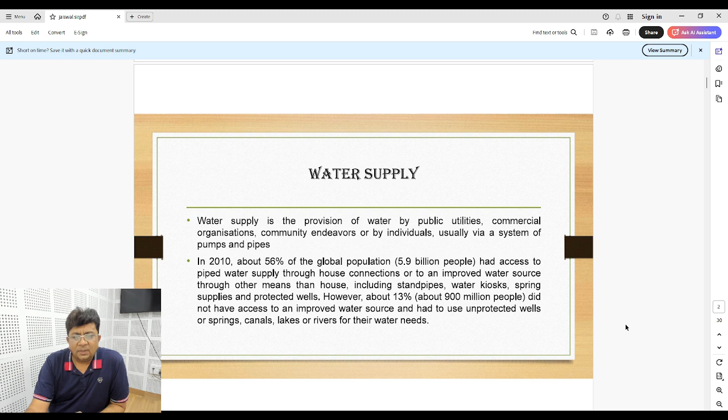The water in our homes comes in a very intermittent way. Many developed countries have the advantage of continuous water supply in their homes, and they take it for granted. But in many developing countries, water is still a problem because the population doesn't have access to a regular supply. They get water on an intermittent basis, sometimes a few hours a day, or maybe a couple of days in a week.

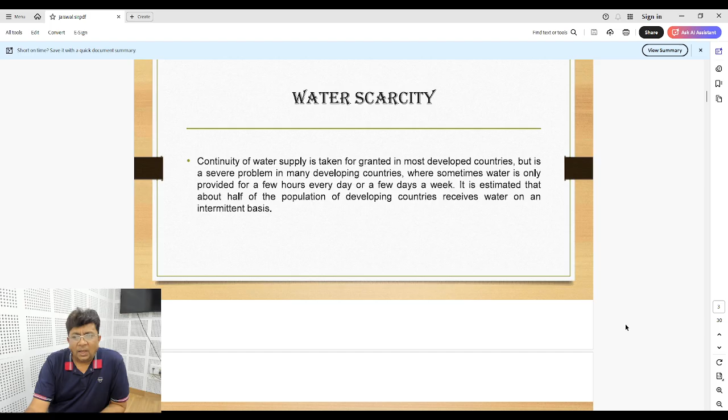In India also the system is not that great. We have states like Rajasthan and some places in Gujarat where there is a huge scarcity of water, and a continuous struggle for the common man to get potable water in their homes.

So to get continuous supply of water in our homes and buildings, we have developed water supply systems to get water in our homes, commercial establishments, industry, irrigation, and for public needs like firefighting and street flushing. The purpose of domestic service water supply system is to provide consumers with enough hot and cold water. In old buildings, it is common to have gravity storage tanks on top of the building, but nowadays we have developed very good systems where we can pump water directly to multi-storey buildings wherever required.

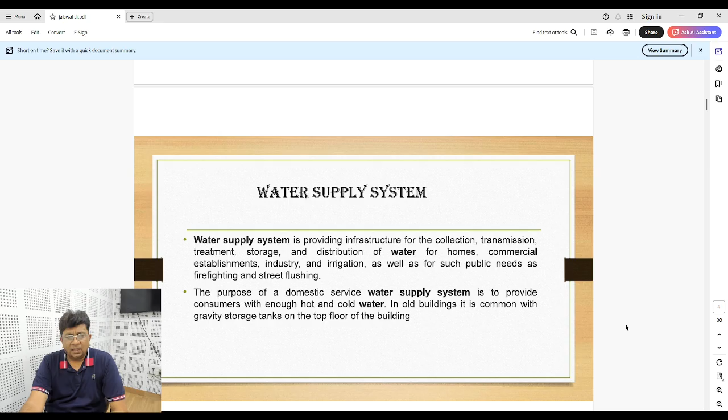My main focus today is to cover the water supply system in a building and in interiors. So we also need to understand the different types of fittings and fixtures available for use in our toilets, kitchens and balconies for domestic purposes.

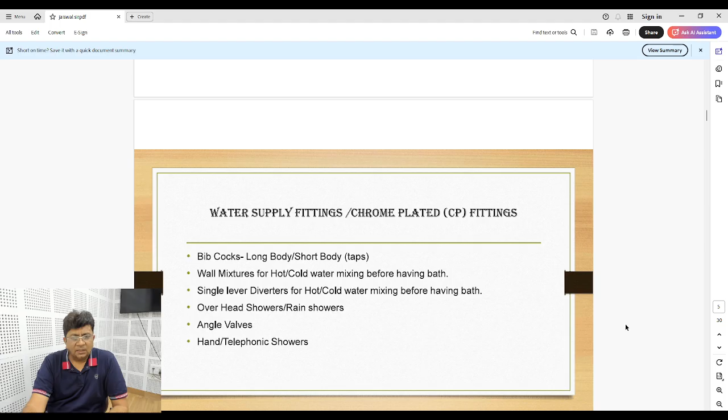For example, there is a bibcock, which we normally call a tap or toti. Then we have wall mixtures for mixing hot and cold water before bathing. Then we have single lever diverters - as the word tells you, it's a single lever which operates, and you can use it to get the desired mixture of hot and cold water.

We have overhead showers for a luxurious feeling of bath. One can also have rain showers, which will give you the feeling of bathing under the rain.

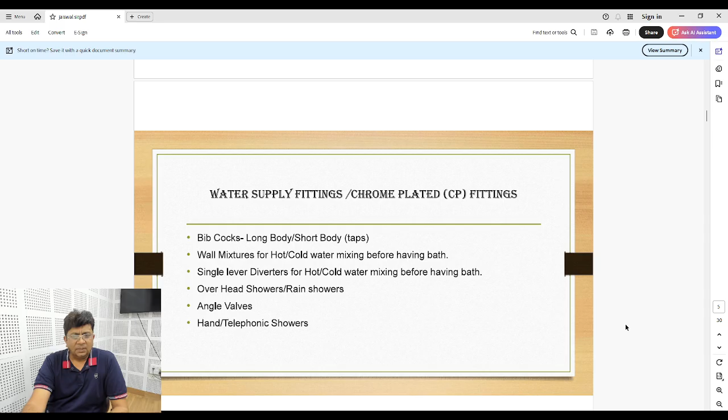Then the angle valves. Angle valves is basically a fitting which controls the flow of water to the main, for example, bibcock or the cistern or the diverters. Then we also have hand and telephonic showers.

Then there are the CP fittings. CP is like chrome plated fitting, for example, health faucet, which is used with the WC, and angle valve, as already told. Then we have wash basin mixer.

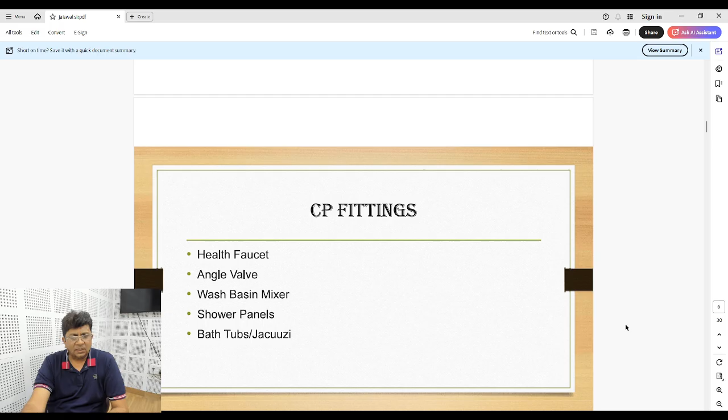Wash basin mixer is popularly known as basins. Then shower panels. Shower panels is like one panel which is installed in the toilet, where you can have multiple water outlets at different levels, which can enhance the feeling of having a bath.

Then there's a bathtub. Bathtub, as we all know, is normal. You can fill the tub with water and can have a good feeling of having a bath in a tub.

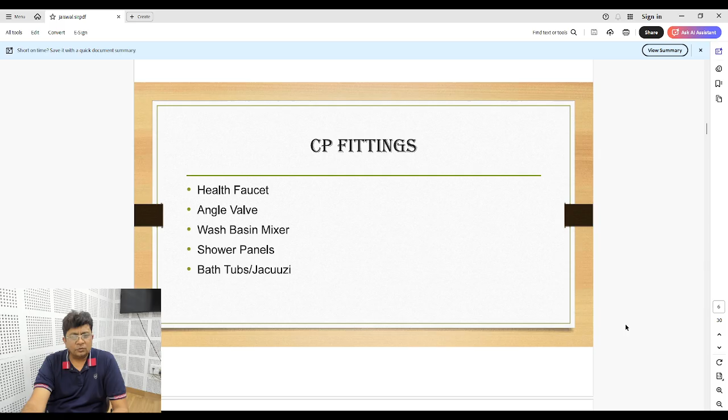And then there's a jacuzzi. There's a slight difference between bathtub and jacuzzi. It's the same as a bathtub, fitted with pressure pumps, so that you can have water coming out in force to give a relaxing or soothing experience of having a bath.

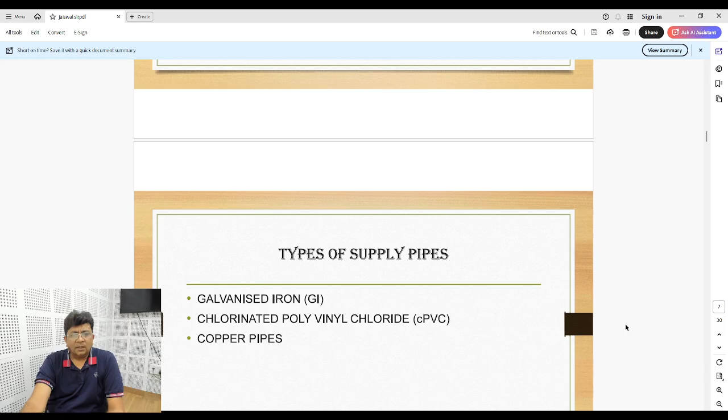Different types of water supply pipes are available to carry water up to our toilet. Earlier, we used to have galvanized iron, or GI system, but that is becoming obsolete nowadays since the advent of PVC. In toilets, water supply is basically done with CPVC pipes, called chlorinated polyvinyl chloride.

Plastic, as we all know, is a very recent discovery, and it may be a disadvantage in many other industries, but in interior services for water supply purposes, it has a huge advantage of carrying water over GI, because having a water supply system with GI was very cumbersome. There was a lot of logistics required, and it was easily prone to wear and tear.

But CPVC pipes have long life and are very simple, easy to carry and transport, and are also long durable. So CPVC pipes have huge advantages over GI pipes in water supply systems.

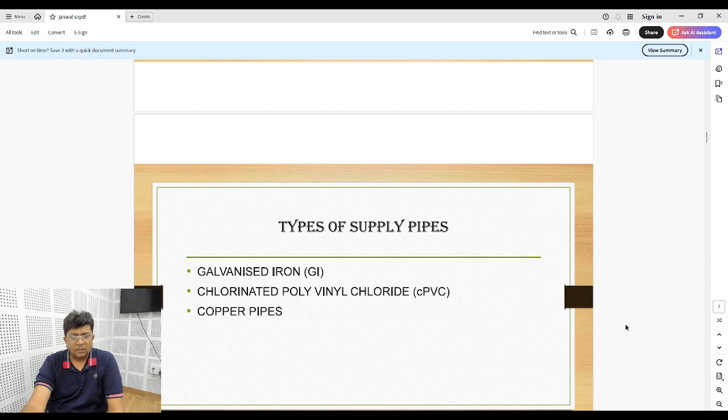Then there are other means of transporting water to our homes. Nowadays, copper pipes are also getting popularity because of their long life and less contaminated water supplied to our homes.

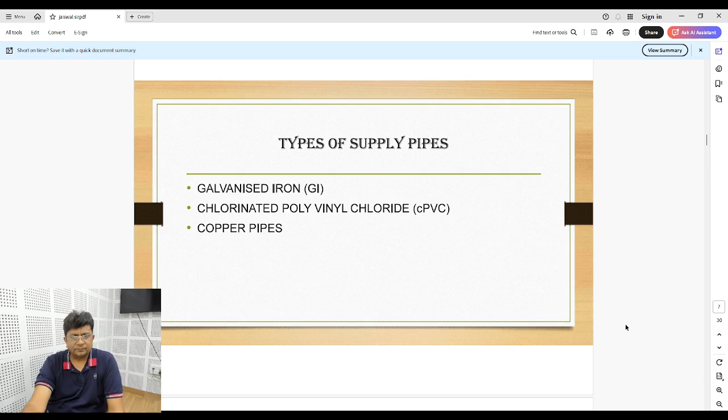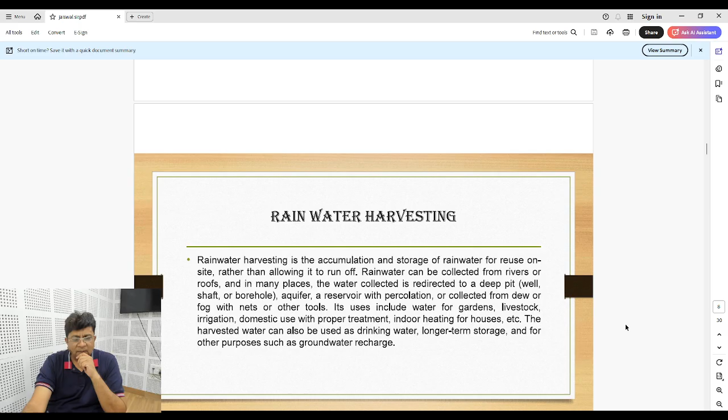Before we get further into the water supply system, as already told, there's a lot of scarcity of water in our states, in our country. So it is very important to have a rainwater harvesting system.

What does rainwater harvesting do? It is not a very new concept. In earlier ages, like Mohenjo-daro and Harappa, the earliest civilizations, we discovered there was a proper water harvesting system. Now, as we all know, the rainy season is just 2 or 3 months in a year. The rest of our months are mostly dry and hot weather.

So, to have a continuous supply of water in our homes, we should actually depend upon the rainwater harvesting system. People may think rainwater is in very abundance, but the moment rainwater touches the ground, it gets contaminated.

So there are two ways of harvesting rainwater. One is, in our buildings, so much water falls on the terraces. The water falling on the terrace can be easily collected through a proper drainage system, and it can be collected into an underground tank or underground reservoirs, for future use.

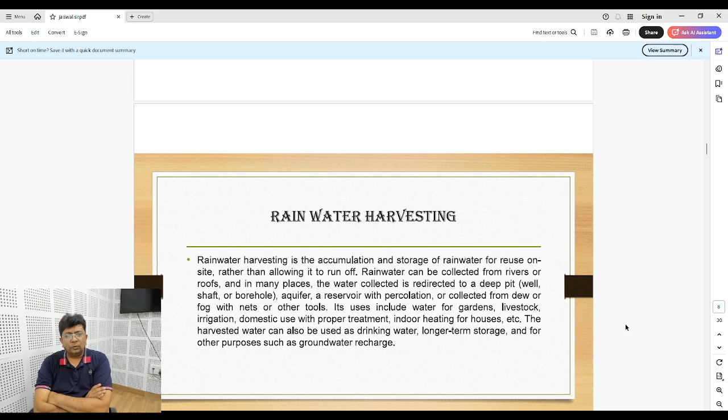Rainwater, as we all know, is one of the purest forms of water. So this water collected in the tanks, I'll show you the pictorial photograph also.

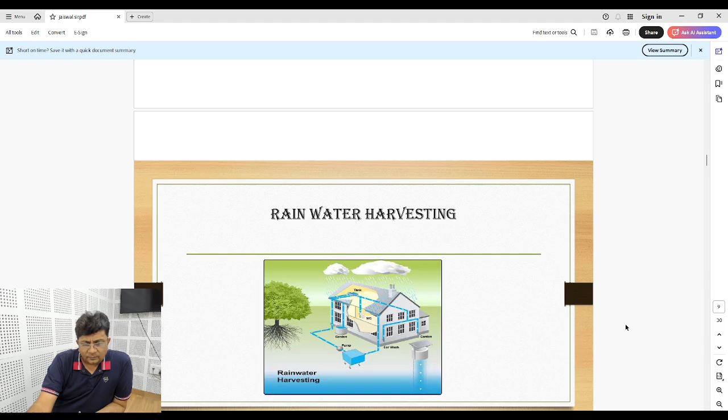So we see there are two methods of rainwater harvesting. One is carrying the water which falls on the roof through a proper drainage pipe; it gets collected into an underground tank. We can make a huge tank within the vicinity, 10,000 or 20,000 liters, depending upon the catchment area of our terraces, and that water can be used in the future for many purposes.

For example, car wash, gardening, irrigation, and so many other things. And if you could properly filter it, you can use it for drinking also.

There's another method of rainwater harvesting called the recharge method. As we all know, the water which we use for drinking purposes basically comes from underground water. We deploy submersible pumps to extract water from the ground, which is supplied to our homes. Underground water is also one of the purest forms of water, but the problem is, in recent days, we have been overusing the underground water.

The result is that underground water, which is normally around 50 to 60 feet under the ground level, is going below the water level. The water level is depleting. Like earlier, like 10 years back, the water level was 50 feet. Nowadays you might find at some places it has gone down up to 80 feet. The more it goes down, the more difficult it becomes to extract water for our regular use.

So with the rainwater harvesting system, what we can do is recharge our existing underground water, by making a bore up to 40-50 feet deep, and with the proper drainage system, we can get that water to flow into the underground water, so that the water level is maintained and it doesn't deplete. So this is also one method of rainwater harvesting.

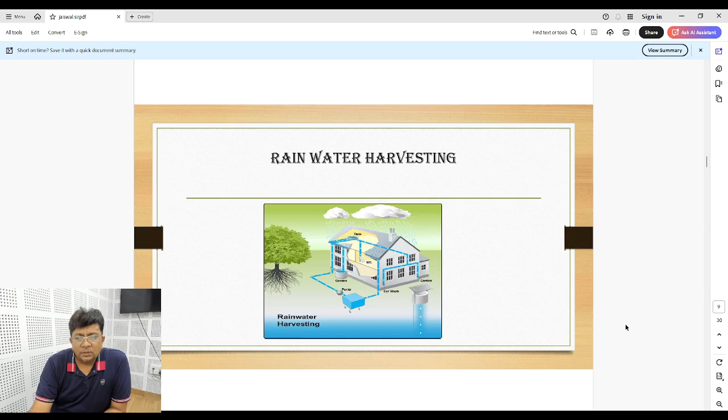Rainwater harvesting plays a major role in areas where we have scarcity of water, and with the use of rainwater harvesting system, we can ensure the water supply throughout the year without much interruption.

Going back again to the water supply system, as I told you about the different fixtures used for the supply system, we also have different fixtures used for the drainage system. For example, the WC, the water closet, in the bathrooms, sinks used in the kitchen for washing utensils, wash basin, etc., are important components of a house.

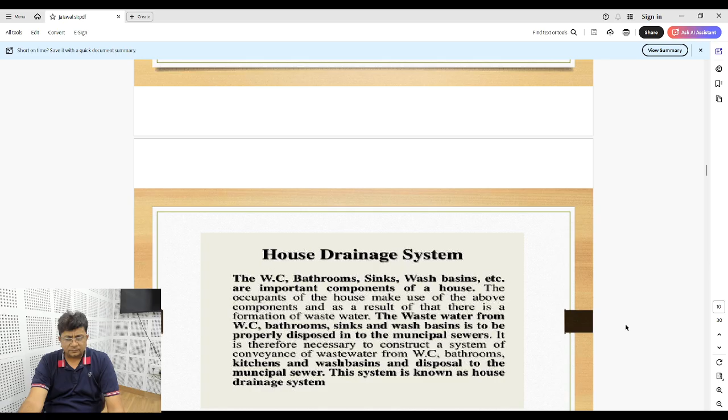The wastewater from wash basin, WC, and bathroom sinks has to be properly disposed into municipal sewers. We should understand the importance of the drainage system also.

The water which is supplied to a house is very important. Without water we cannot survive much, maybe a maximum of 1 or 2 days. Equally important is the drainage system. There is importance of water supply system, and equally there is importance of drainage system, because we have to remove the contaminated water which had been used by the inhabitants.

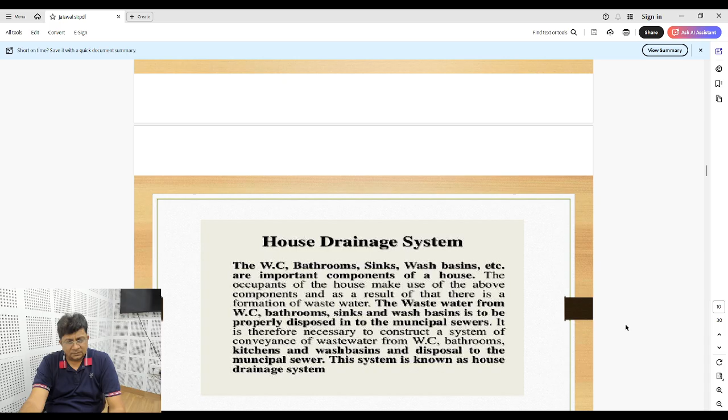We have to remove that water as soon as possible from a building, otherwise it becomes a source of so many infections and outspread of diseases. So it is necessary to construct a system of conveyance of wastewater from WC, bathroom, kitchen, and wash basin, and dispose it to the municipal sewer. This system is also known as drainage system.

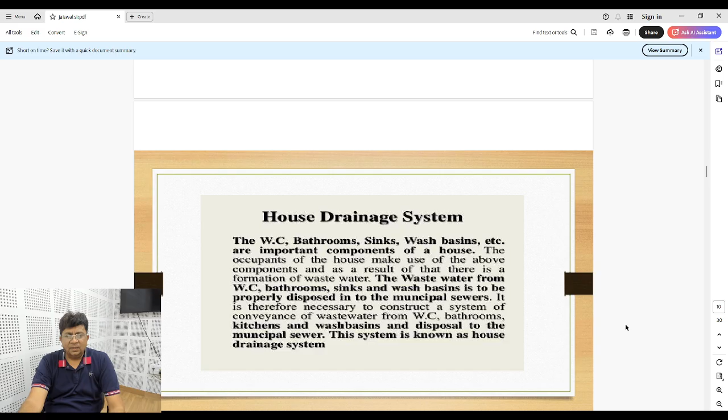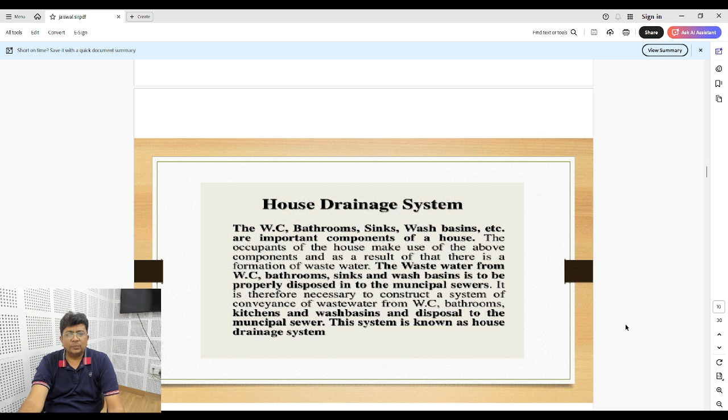So we have to design the water supply system, and we also have to properly design a house drainage system. In India, even in so many modern cities, we are still struggling - we don't find a very good drainage system. So it is important while designing a building to design a proper system of water supply and a proper system of draining that contaminated water to the municipal sewers. Both things are equally important.

Before going for the design, there are certain terms we should be conversant with. For example, wastewater - when water is used for different purposes like domestic, commercial, industrial, and receives impurities, it becomes wastewater. This wastewater has physical, chemical, and biological impurities in it.

Wastewater is a general term, used after we use water for personal or industrial uses. The water which comes out as waste is called wastewater, which has to be disposed of.

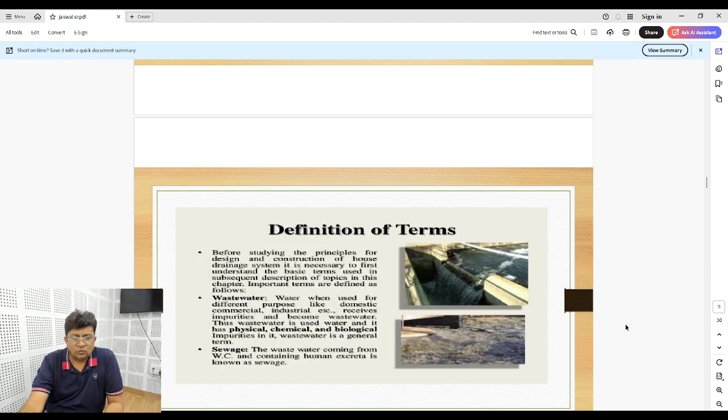Sewage - the wastewater coming from the water closet and containing human excreta is known as sewage. Sewage water is one step further - it's of no use, because it contains human excreta. There are a lot of bacteria and germs in it, and it is very tough to reuse that water. Therefore we have to segregate wastewater from the sewage water coming out from the building.

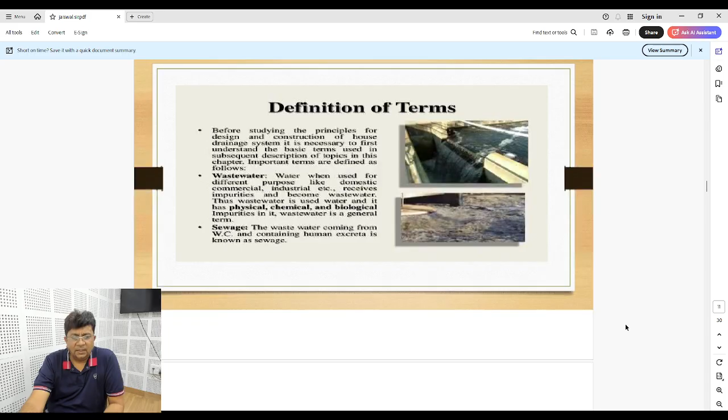And sullage - what is sullage? The wastewater coming from bathroom and kitchen which does not contain fecal matter is known as sullage. The water which does not contain human excreta, coming directly from the bathroom and kitchen, is called sullage.

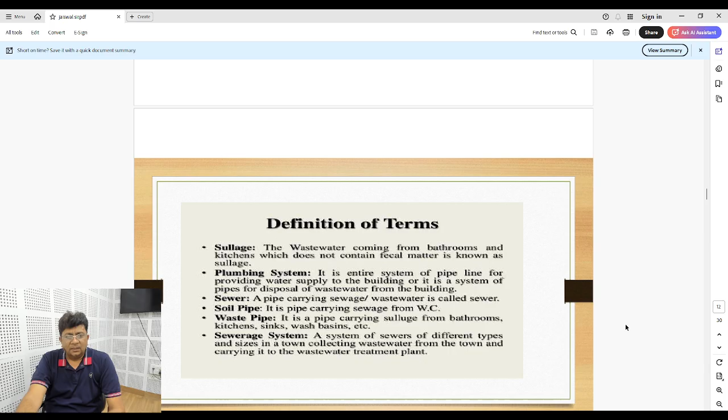What is a plumbing system? It is an entire system of pipeline for providing water supply to the building, or a system of pipes for disposal of wastewater from the building. The entire system of water supply and drainage is called the plumbing system. A sewer is a pipeline carrying sewage wastewater.

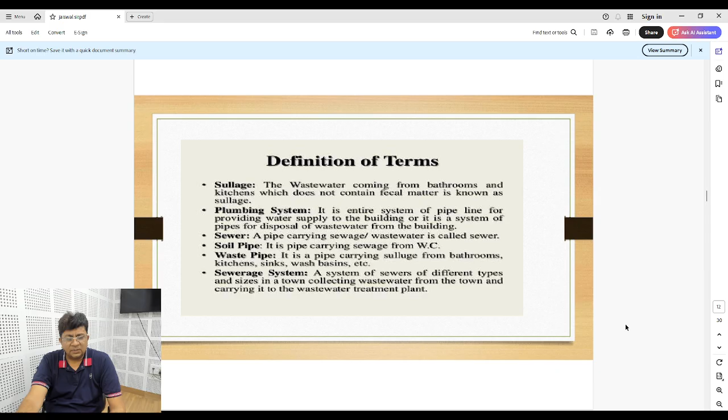What is a soil pipe? A soil pipe is a pipe which carries sewage from the WC to the external septic tank or the municipal sewer line. A waste pipe is the pipe which carries the wastewater, like for example from the kitchen sink and wash basin.

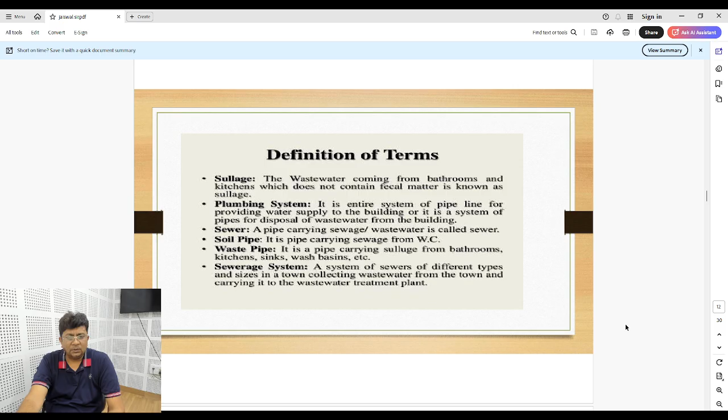A sewerage system is a system of sewers of different types and sizes in a town, collecting wastewater from the town and carrying it to the wastewater treatment plant.

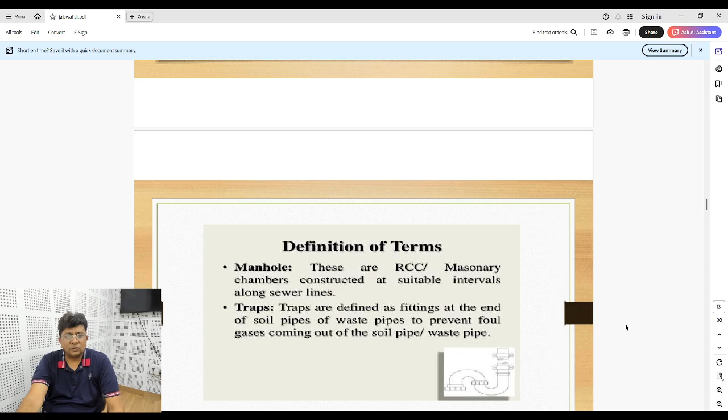There are other terms also. For example, manhole - as the name suggests, is a hole which a man can enter. These are RCC masonry chambers constructed at suitable intervals along sewer lines, basically intermittent chambers constructed at regular intervals for the maintenance of sewer lines in case of any blockage or choking.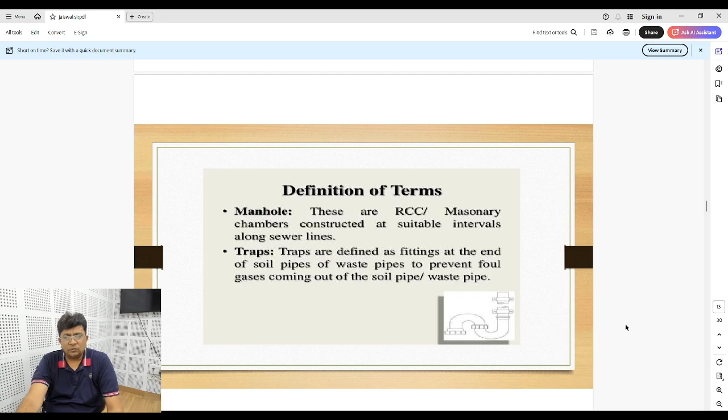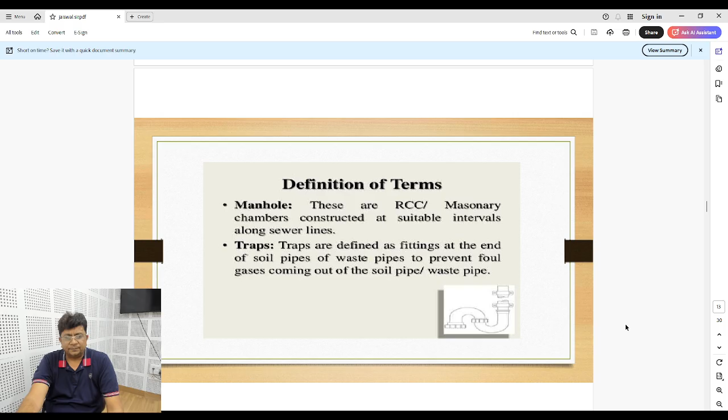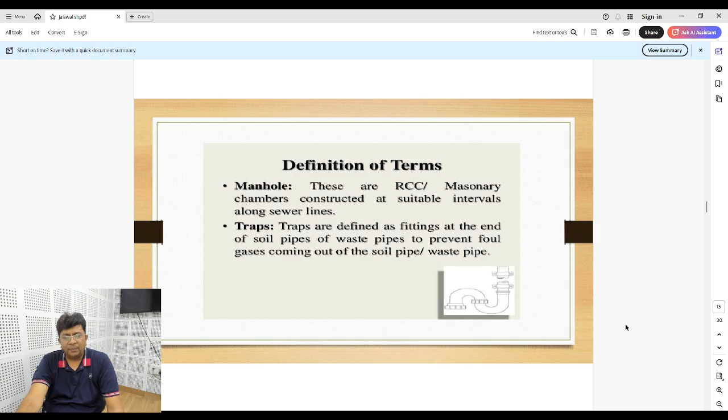Then there's a very important fixture used in our buildings called traps. Traps are defined as fittings at the end of soil pipes or waste pipes to prevent foul gas coming out. As you see in the diagram, the construction of the trap is such that its mechanism prevents foul smell from coming back into the building, washroom or kitchen. The construction makes it suitable to create a water seal in between, which acts as a barrier to foul smells and gases.

Now, while designing a house drainage system, we have laid down certain principles which have to be followed for a good design. So for a good house drainage system, let us go one by one.

House drainage should preferably be laid by the side of the building. It should not run just underneath the building. We should prefer to have the drainage system along the side of the building in the open space as far as possible. House sewer joints should be leak proof, because leakage shall create an odor problem, and leaked wastewater shall infiltrate into the ground and reduce the bearing capacity of soil below the foundation, which is not desirable.

Now this is very important - sewage should flow under the force of gravity. The house sewer should always be straight; there should not be any undesirable bends at different angles. It has to always be in a straight line. Wherever you need a turn, it should be at 90 degrees, with a suitable chamber or trap constructed at the junction of that turn.

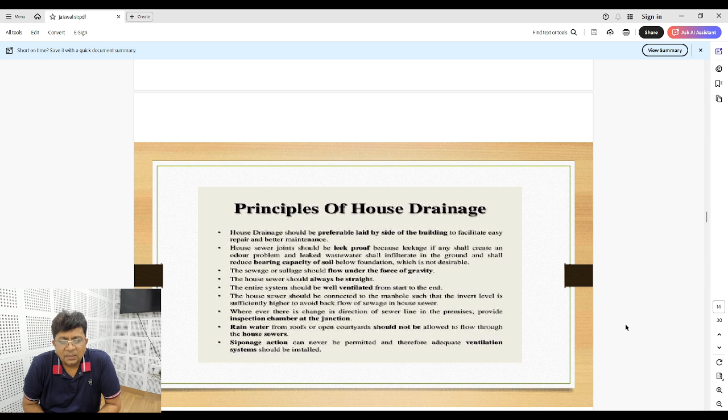This should be done with the help of a rainwater harvesting system, which we already discussed. For example, we can make a big underground chamber and collect it there, or we can recharge our existing water table with recharge systems. Then siphonage action can never be permitted, and therefore an adequate ventilation system should be installed.

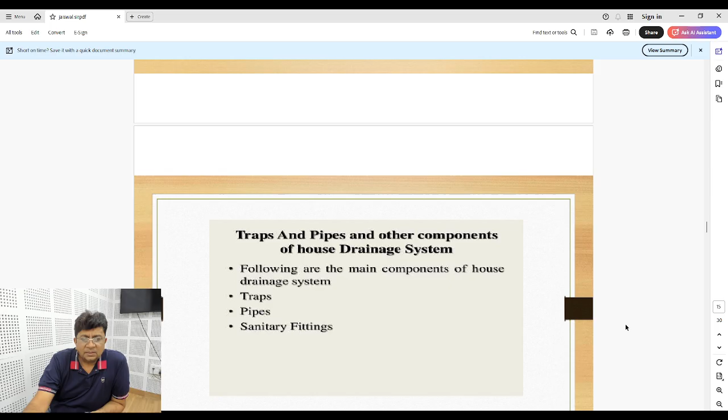Then there are some main components of a house drainage system. For example, traps - we will go through the different types of traps in subsequent slides. Pipes we already told you. Then sanitary fittings.

Then we also have to take care of our drainage system - we have septic tanks and soak pits. Sewage from the WC is collected and treated suitably in septic tanks and soak pits before it can be used in environmentally friendly ways or discharged into the city drains.

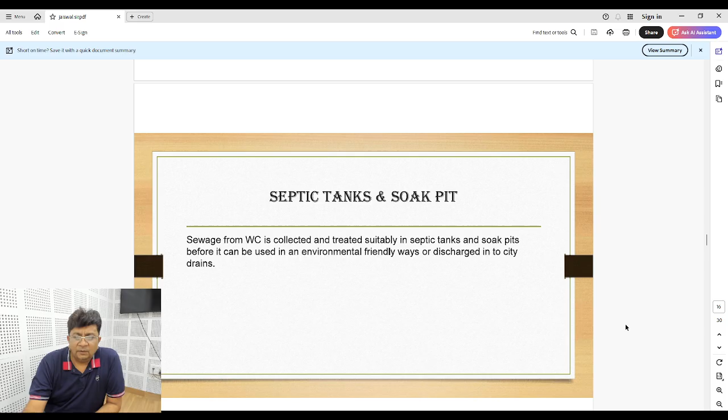We should not take out the sewage water and connect it directly to the drain. We should always make a septic tank within our premises, along with a soak pit, and that sewage water is collected and suitably treated to break down the bacteria, and it can be further used in more environmentally friendly ways, in our irrigation system and as a fertilizer also.

Now this is a proper schematic diagram of a septic tank. We can see how the water is coming into the septic tank, and after being treated, the extra surplus water goes into the soak pit and absorbs into the water level. The sludge collected at the bottom of the septic tank is taken out separately and can be used as fertilizer or for irrigation purposes in the fields.

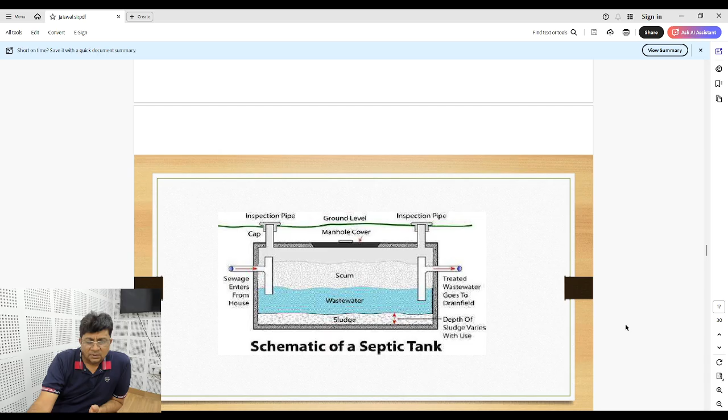There should be proper inspection chambers, and the level should be properly maintained, with care taken that it should not be more than 5 feet deep, in order to carry out the cleaning of the tank in a proper manner.

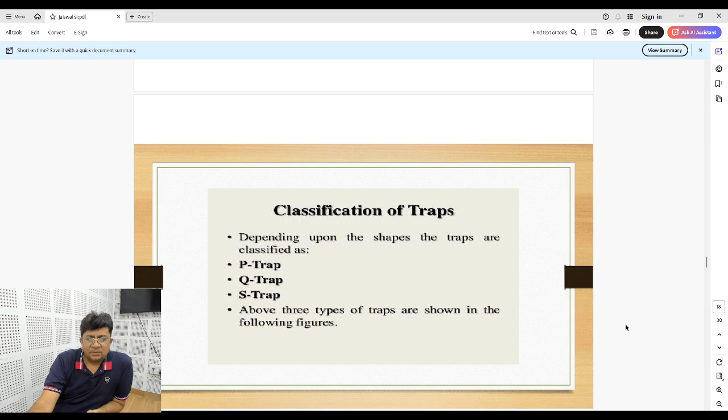Then we have, as I already told you, the different types of traps available for use in the domestic drainage system. We have P traps, Q traps, and S traps, as you will see in these particular diagrams. There are different usages of these P traps, Q traps, and S traps for different purposes in a building. The main idea of using the trap is to create a water seal so that the foul smell doesn't re-enter our rooms, toilets, and kitchens.

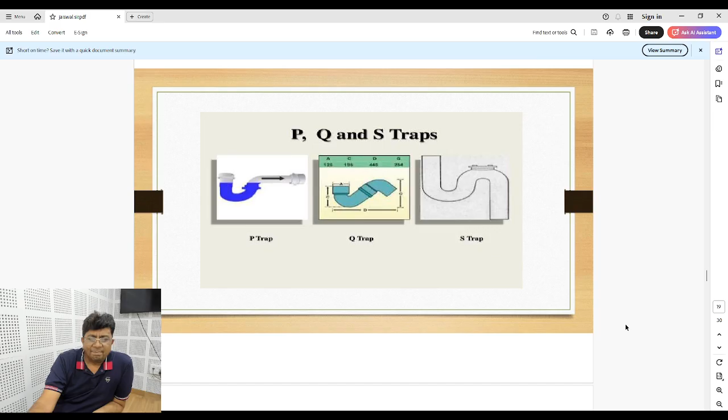And this is a real picture of a P trap, which is the most common type of trap used in buildings, in the bathrooms.

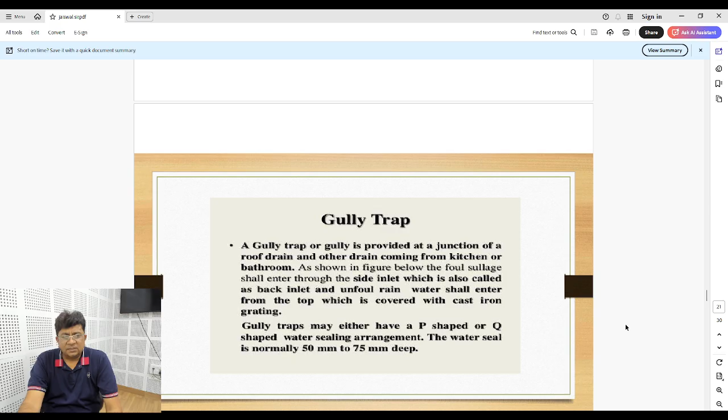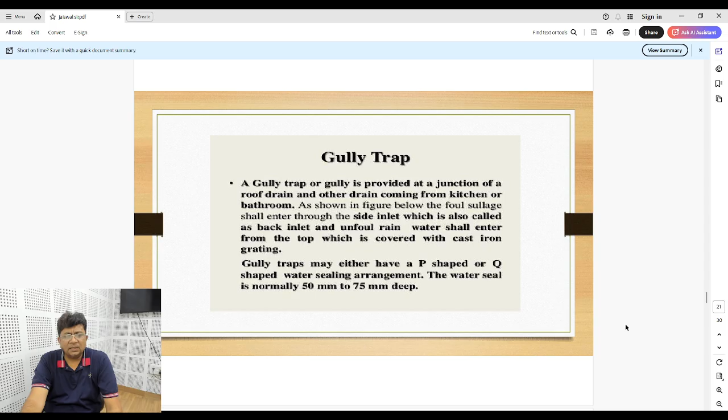Then we also have a gully trap. This is very important. A gully trap is provided at the junction of a roof drain and other drains coming from the kitchen or bathroom. As shown in the figure, the foul sullage shall enter through the side inlet, also called the back inlet, and unfouled rainwater shall enter from the top, which is covered with a cast iron grating. Gully traps may either have a P-shaped or Q-shaped water sealing arrangement. The water seal is normally 50 mm to 75 mm deep.

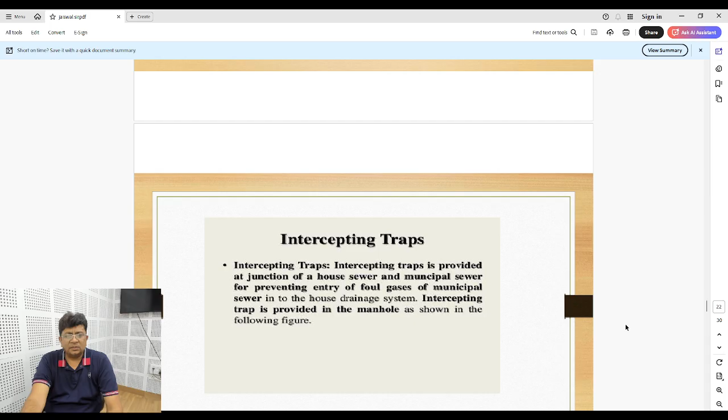Then we have intercepting traps. What are intercepting traps? An intercepting trap is provided at the junction of a house sewer and municipal sewer for preventing entry of foul gases of the municipal sewer into the house drainage system. Even if we have a municipal sewer running in front of our main house, before we connect the drainage system to the municipal sewer, there should be intercepting traps. This prevents foul gases from entering the main drainage system of the building, and it also helps in maintenance and cleanliness of the house drainage system.

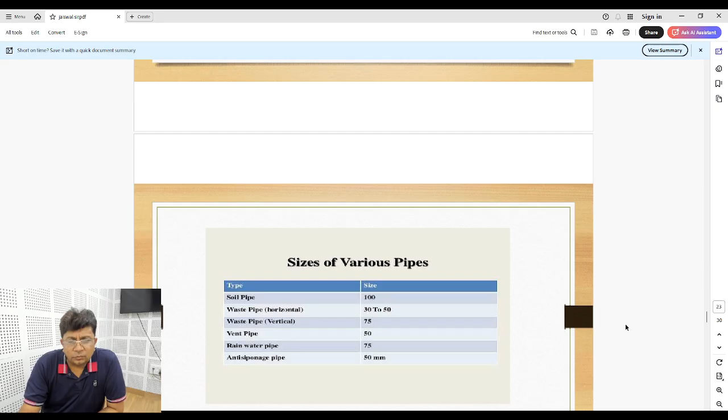Then let us go through the different sizes of various pipes used in the house drainage system, basically called UPVC system, unplasticized polyvinyl chloride. These sizes we are recommending are the minimum sizes. For example, the soil pipe should never be less than 100 millimeter in diameter. The waste pipe, horizontal, should not be less than 30 to 50 mm, and the vertical pipe should be 75 mm, not less than that.

We also use a vent pipe for the discharge of foul gases, which should not be less than 50 mm diameter. The rainwater pipe has a minimum size of 75 mm, but normally it is recommended to use 100 millimeter. Then we also have the anti-siphonage pipe, which is used to prevent the backflow of water, with a size of 50 millimeter in diameter.

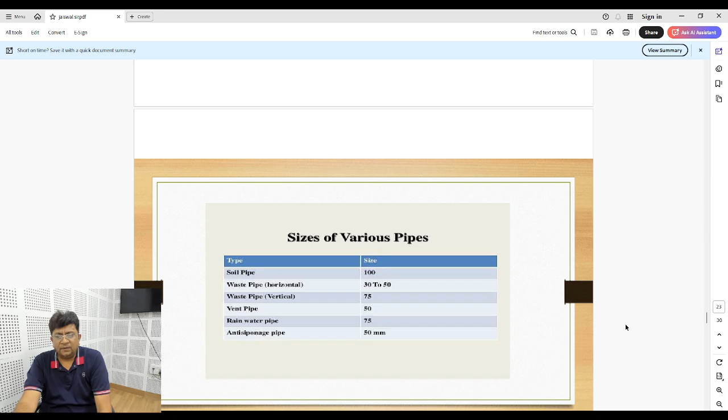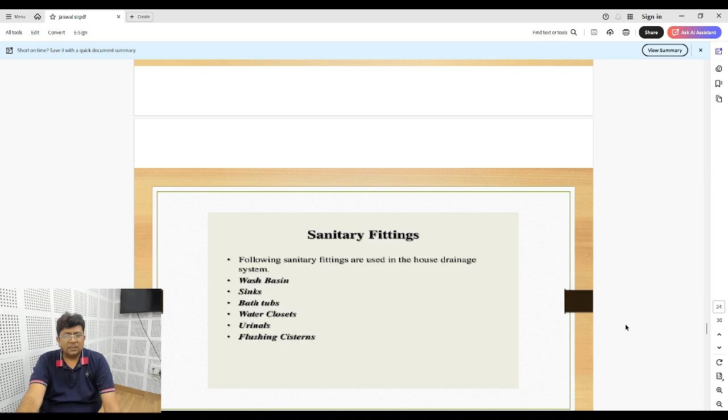Following that, there are different sanitary fittings which I already touched upon, used in a house drainage system. For example, wash basins, sinks, bathtubs, water closets or WC as we call it, urinals, or bidets. Flushing cisterns are also used to flush the sewage from our toilet.

One of the most important fixtures used in our modern toilets is the water closet, popularly known as WC. A water closet is a pan-like, water-flushed plumbing fixture designed to remove human excreta directly and dispose of it into the soil pipe through a trap. We all use it in our toilets on a daily basis. It is generally made of vitreous china or porcelain, and is connected to the soil pipe through the trap.

It is very important that the WC be connected to the main sewer line through a trap. It should not be connected directly with the help of an elbow or any T-joint; there should always be a trap in between. The inside surface of the water closet and trap are glazed so that the flushing is smooth and efficient, does not get contaminated easily, and becomes very easy to clean. The underlying surface should be glazed.

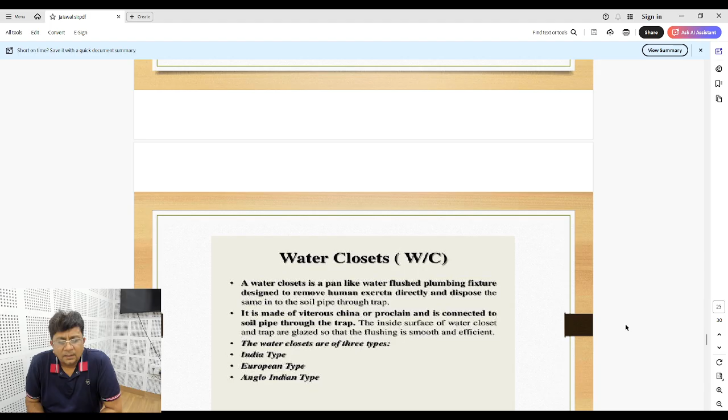There are three types of water closets available in Indian markets. For example, the Indian type, also called the Orissa pan. Then we have the European type, which can be used by sitting on top of it. Then there is the Anglo-Indian type, which is a mix of Indian and European style. One can choose any type of WC as per their comfort and usage.

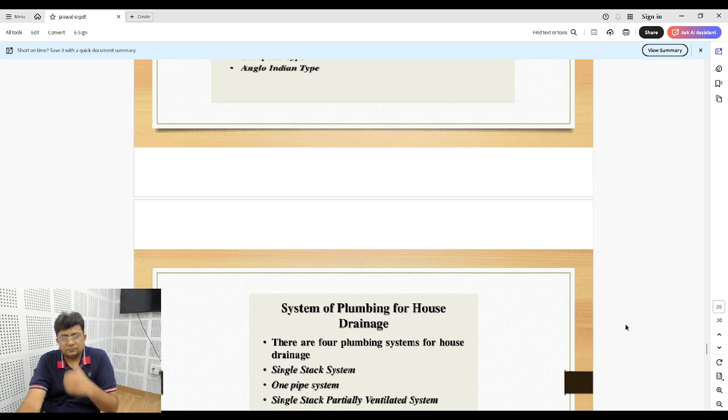There are different types of plumbing systems for house drainage. This is important because when we talk about having a proper drainage system in our houses, we should also understand the different types of plumbing systems available for usage. For example, there are four plumbing systems for house drainage.

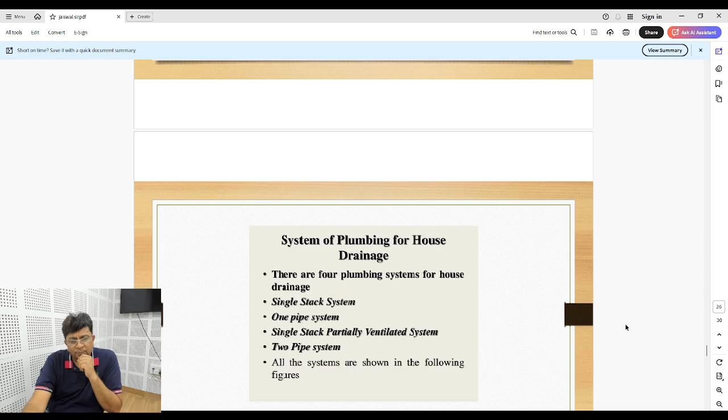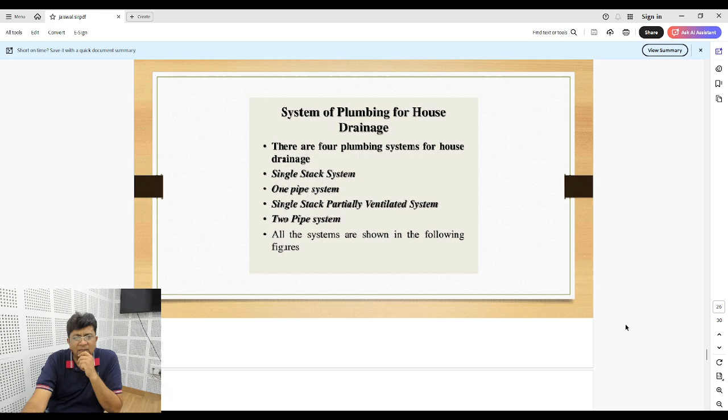One is single stack system, one pipe system, single stack partially ventilated system, and two pipe system. Let us understand the importance of these. Earlier we used to have single pipe system, where a single pipe carries all the sewage and wastewater, which has become obsolete now.

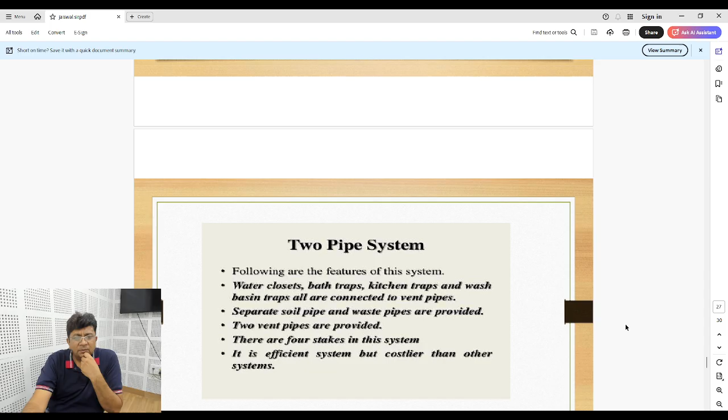Nowadays we have the two pipe system, which is more common and has its own advantages. Let us go through the features. Water closet, bath traps, kitchen traps, and wash basin traps are all connected to vent pipes to prevent backflow of water. Separate soil pipe and waste pipes are provided.

For the soil pipe and waste pipes, we have different pipes. We cannot mix the different types of water coming out from our toilet. It should be carried to the main sewer line or drain separately. Two vent pipes are also provided, which are very important to prevent backflow of water into our plumbing system.

If you count, there are four stacks in this system. Four stacks means four different pipes used in buildings to take the sewage water or contaminated water outside the building. It becomes slightly costlier, but it is the most efficient system for plumbing.

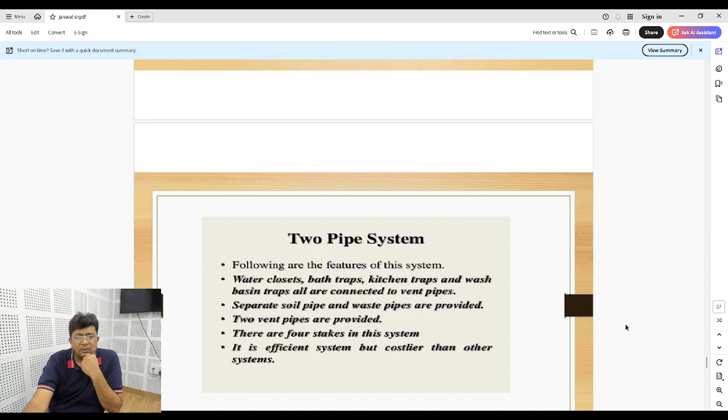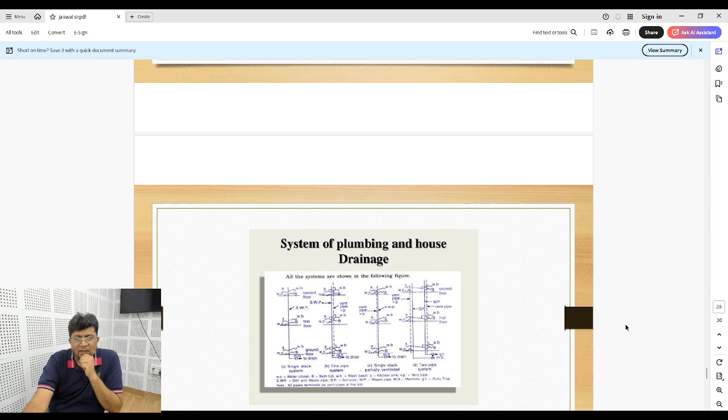Then we have single stack partially ventilated system also, and the most common, as I already told you, is the two pipe system, where there are two different pipes to carry the wastewater and sewage water, both having their own vent pipes to prevent anti-siphonage action and foul smell from coming into the toilet.

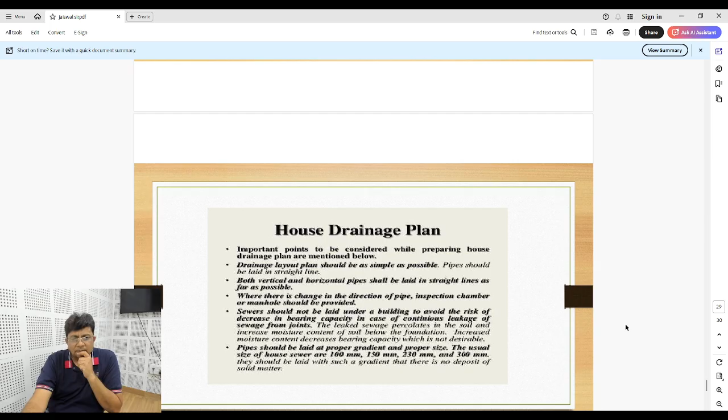There are certain precautions, or design recommendations, which should be ensured while laying down the house drainage plan. Important points to be considered while preparing house drainage plans are mentioned below.

Drainage layout plan should be as simple as possible. Pipes should be laid in a straight line, not in a zigzag manner. There should not be undesirable angles while laying the pipe; it should always run in a straight line. Both vertical and horizontal pipes shall be laid in straight lines as far as possible.

Wherever there is a change in direction of the pipe, an inspection chamber or manhole should be provided. Why? Because there is always a possibility of blockage or clogging wherever there is a change in angle in the flow direction of the pipe. If we make a 45 degree or 90 degree angle, which at times is unavoidable, we have to make an inspection chamber wherever there is a turn in the direction of the flow of the pipe.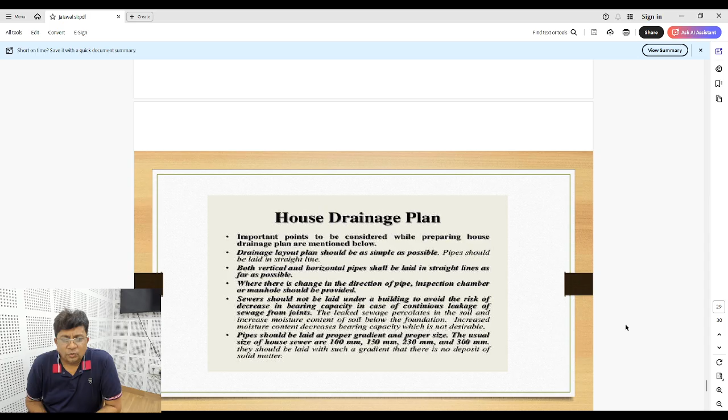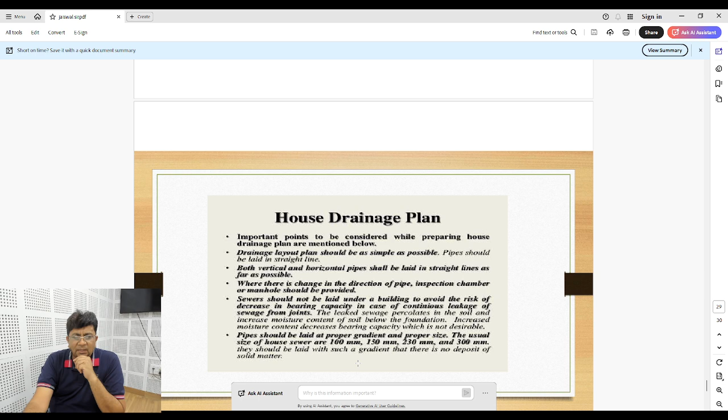The leaked sewage percolates into the soil and increases the moisture content of soil below the foundation. Increased moisture content decreases bearing capacity, which is not desirable at all. Pipes should be laid at proper gradient and proper size. The usual sizes of house sewer are 100 mm, 150 mm, 230 mm, 300 mm. They should be laid with such a gradient that there is no deposit of solid matter.